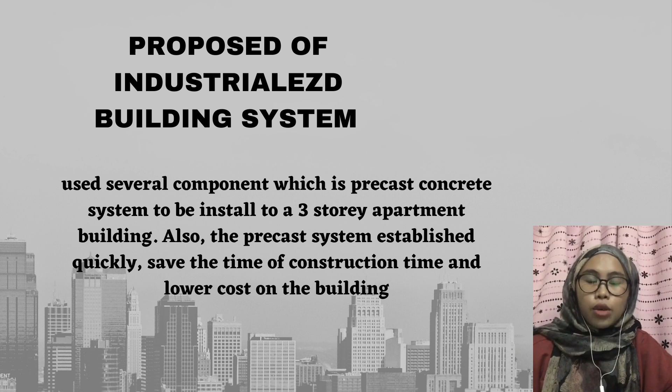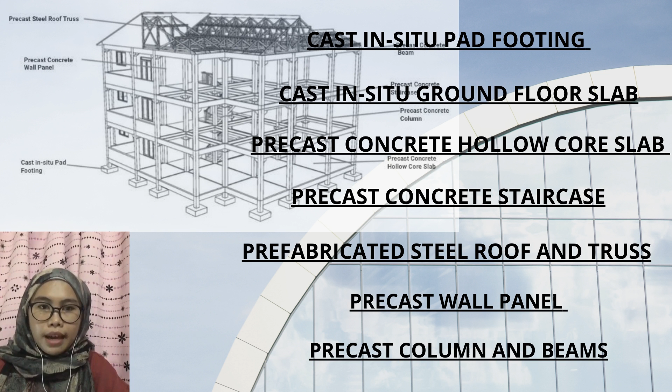Okay, for the framework of this IBS system project, it includes cast in situ pad footing, cast in situ ground floor slab, precast concrete hollow core slab, precast concrete staircase, prefabricated steel roof truss, precast wall panel, and the last one is precast column and beam.

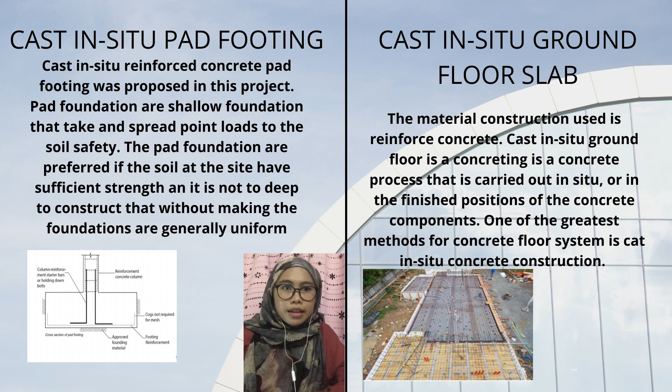For cast in situ pad footing, cast in situ reinforced concrete pad footing was proposed in this project. Pad footings are shallow foundations that take and spread point load to the soil safely. The pad foundation is preferred if the soil at the site has sufficient strength. Other than that, for cast in situ ground floor slab, the construction material used is reinforced concrete, which is a concrete process that is carried out in situ.

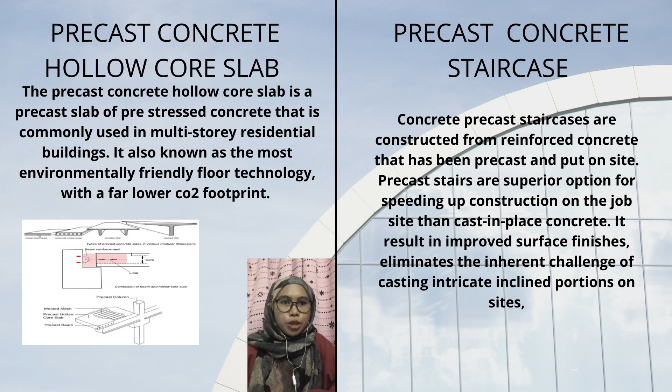Next is precast concrete hollow core slab. The precast concrete hollow core slab is a precast slab of pre-stressed concrete. This is commonly used in multi-story residential buildings. It is also known as the most environmentally friendly floor technology with a far lower CO2 footprint. For precast concrete staircase, it is constructed from reinforced concrete that has been precast and put on site. Precast stairs are a superior option for speeding up construction on the job site than cast in place concrete.

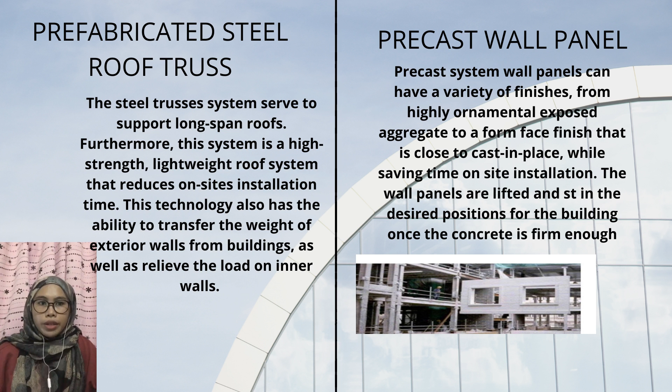Okay, for precast wall panel, precast system wall panels can have a variety of finishes, from highly ornamental exposed aggregate to form face finish that is close to cast in place, while saving time on site installation. The wall panels are lifted and set in the desired position for the building once the concrete is firm enough.

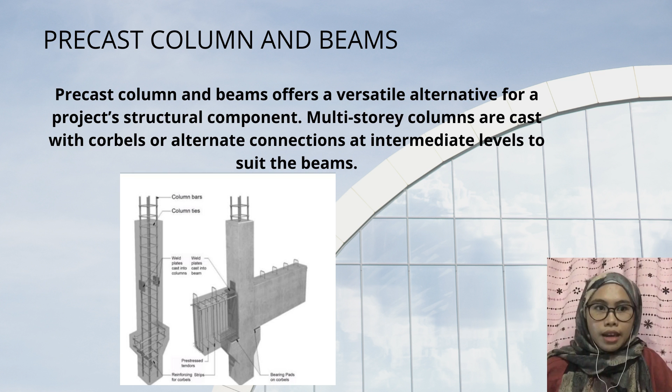The last one of the framework of the IBS system is precast column and beam. Precast column and beam offer a versatile alternative for a project's structural components. Multi-story columns are cast with corbels or alternative connections at intermediate levels to suit the beam.

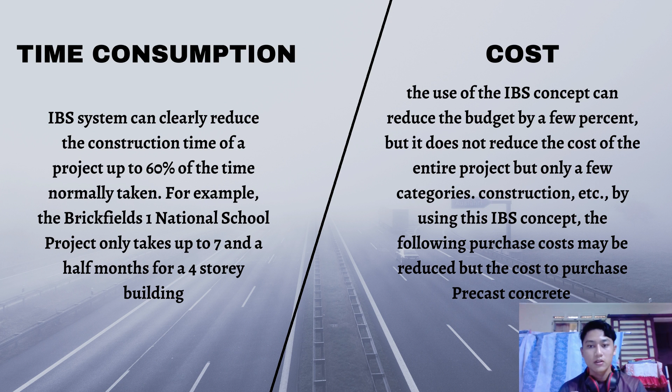So today I would like to present about the suitability for the IBS system. First is time consumption. In the use of the IBS system, the time factor must also be taken into account. This is because each section will be installed in its own order. When there is a component such as a column that has a problem, it will cause the installation order to be interrupted. The second is cost. The cost factor is also important. This is because the use of IBS can only reduce the cost of the material, but it will increase other costs such as transportation costs, installation wages, and others.

The third is the safe bearing capacity of soil. The bearing capacity of soil factor is also very important, especially when installing components for the foundation base. Poor soil condition will cause risk to the building. Fourth is the load to be supported. The main thing that needs to be taken into account in the use of the IBS system is the load of the building. This is because it will determine the size and also the type of concrete grade that will be used in the manufacture of precast concrete. If the calculation is wrong, the building's columns cannot support the weight of the building and it may collapse.

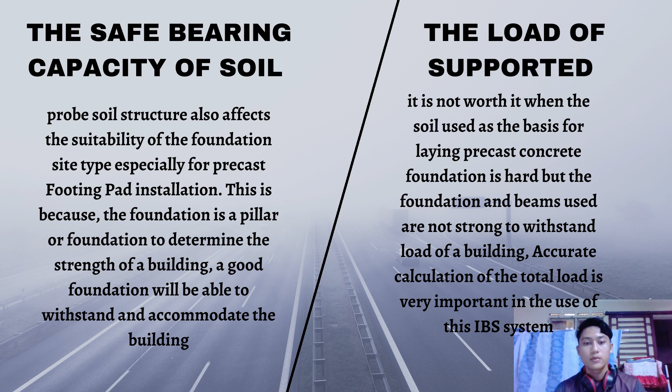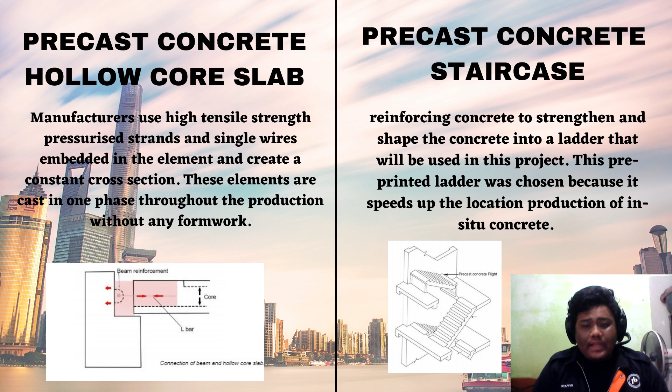Okay, the first is precast concrete hollow core slab. Manufacturers use high tensile strength, pressurised strands, and single wire embedded in the element, cast in one phase of production without any formwork. Okay, the second is precast concrete staircase. Reinforcing concrete to strengthen and shape the concrete into a stair that will be used in this project. Okay, the next is precast wall panels. A variety of finishes from highly ornamental exposed aggregate to a finish that is close to cast in place.

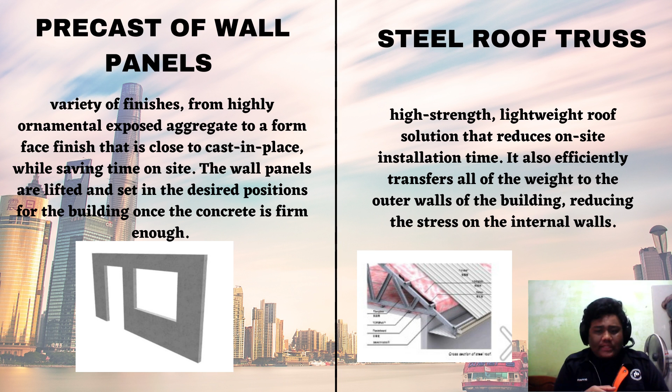The fourth one is steel roof truss. High strength, lightweight roof solution that reduces on-site installation time. It also efficiently transfers all weight to the outer walls of the building, reducing the stress on the internal walls also.

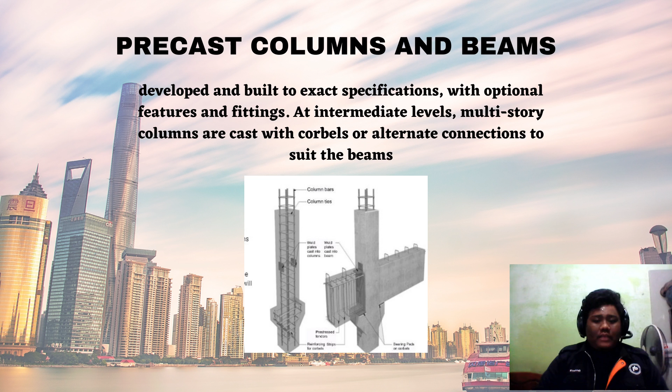Okay, the last for the fabricated process is precast columns and beams. Developed and built to exact specification with optional features and fittings. At intermediate level, multi-story columns are cast with corbels or alternate connections to suit the beams.

Okay, next is connection detail. The first connection detail is a pad footing. Create an excavated land to allow concrete pouring. After that, they're jointed to each other with a bolt mechanically connected to the column splice.

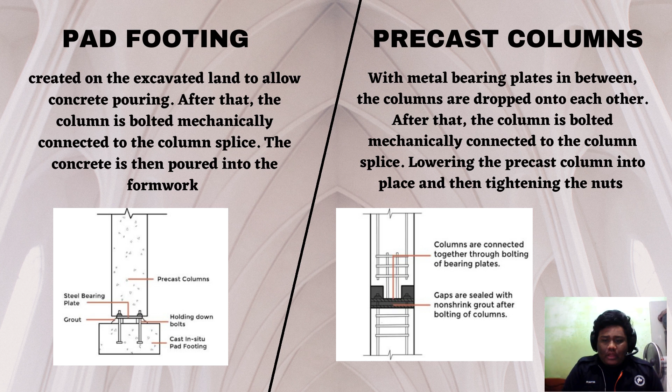Okay, the second one is precast columns with the metal bearing plate in between, the columns dropped onto each other. After that, the column is bolted mechanically to the column splice. Lowering the precast column into place, then tightening the nuts.

Third is precast beams. For precast beams, a metal bearing pad is used to connect the precast beam to the column corbels. After that, the workers will weld plates precast into the column and beams.

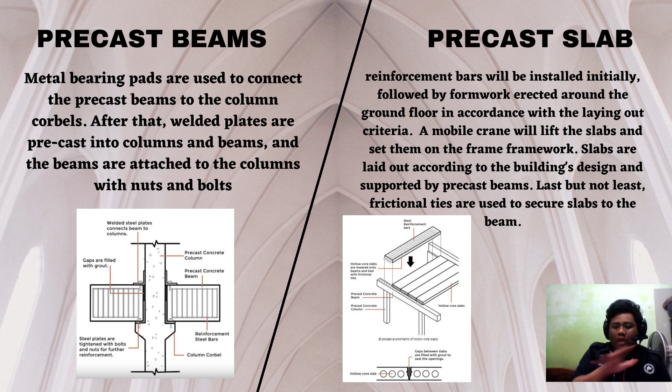Okay, the fourth one is a precast slab. Reinforcement bar will be installed initially, followed by formwork erected around the ground floor in accordance with the layout criteria. And then the workers will use a mobile crane to lift the slab and set them on the framework. Slabs are laid out according to the building design and the structure plan.

Okay, the next connection detail for this IBS case study is precast walls. To install the panels, the workers will use metal plates, and angles are also used to connect panels to each other, like this, and to floor and roof elements. For the wall panel, the workers will weld or bolt them together.

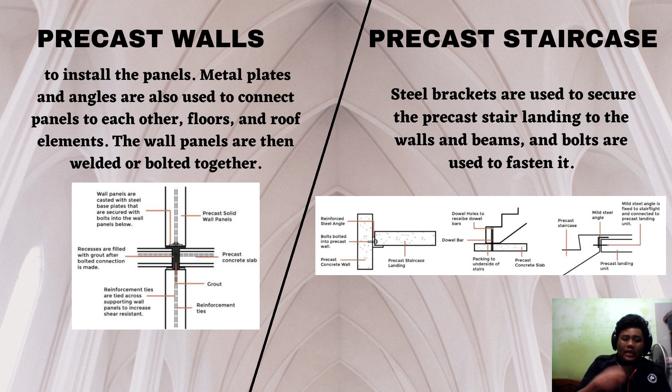The next is precast staircase. Steel brackets are used for jointing the staircase and landing to the walls and beams, and bolts. Then the workers tie them, and bolts are used to fasten it.

Okay, the last one for the connection detail is prefabricated steel roof. At this point, they use a beam connection secured with bolts and nuts. The purlins are then bolted and nutted to the truss. Underlayment material is covered with galvalume. Then metal roof panels are secured to the roof using screws.

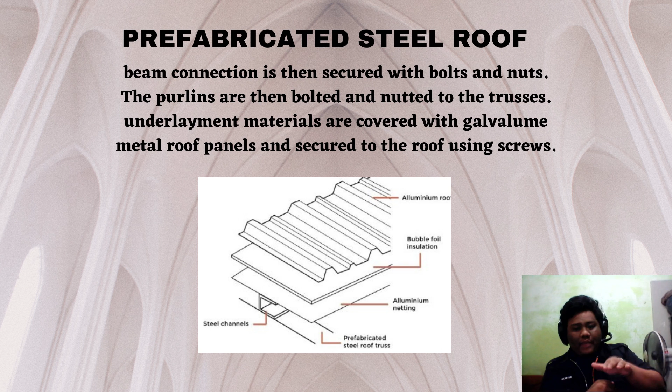Okay, next is the installation procedure. In this installation, we have two types: before the installation, and the second one is during the installation or during the project. Okay, before the project starts, firstly, the client. The client will ask the consultant to help him realize his idea to build the building he requested.

In this situation, the consultant may suggest the client use the IBS system to follow the CIDB request. Then the second one is planning. After the client agrees, the consultants such as architect, engineer, mechanical and electrical engineer, surveyors and others will do planning such as plans, contracts, tendering and other things.

Then submission. After the planning or documentation, the consultant will submit all the documents to the local authority such as pihak berkuasa tempatan and Jabatan Kerja Raya and others involved in government authority for the construction project. Then maybe after a few years or a few months, the local authority will approve the project if there's no problem with the plan, contractor and others.

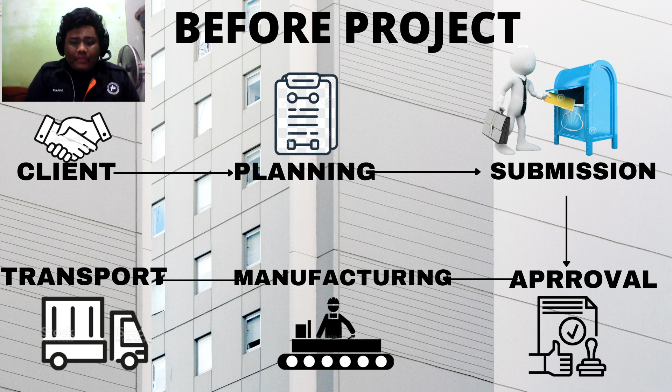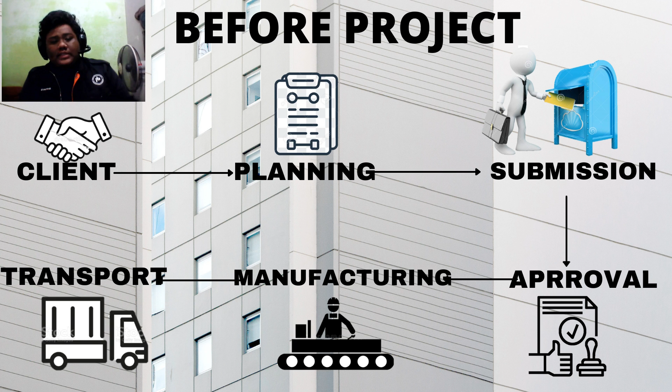Then the consultant will hire a contractor to start the project. After the contractor is hired, at the same time they can also order IBS panels such as walls, slabs, roof truss and others. To start the manufacturing, we send the real specification used in this project. Then after the manufacturing is done, the manufacturer will send all the panels by lorry to the site.

Okay. After that, now we present to you about during the project. Okay, the first step is excavation. The contractor performs excavation work for the foundation before laying the foundation ground beams. This excavation work will follow the plan made by the engineer and also be inspected by the engineer.

And the second one is installation of foundation ground beams. Okay, the contractor will lay the foundation ground beam according to the plan that has been set, and after that, the contractor and also the client will do an inspection to check whether the ground beam is correct according to the plan or not. Then the third one is ground floors.

They start with cast in situ ground floor slab. After that, the contractor can start work on the ground floor slab. They'll place reinforcement on the slab, then pour the cement on that slab.

Okay. The fourth one is precast columns. The contractor will use a mobile crane to transport the columns to each point that has been marked by the workers. When the column has been lifted by the mobile crane, the worker will attach the column with the bolts and nuts between the column and the plate.

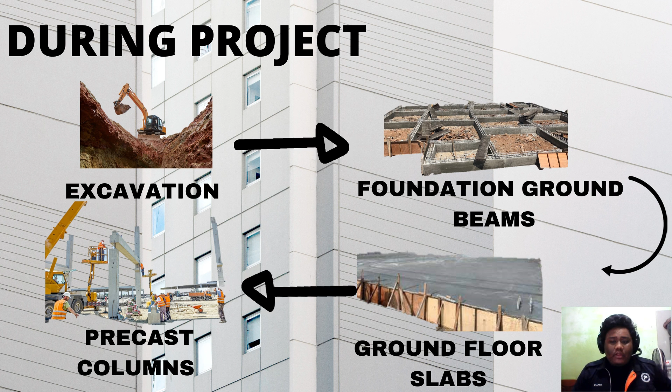Okay. The next is the work for the precast walls. The contractor will use a mobile crane to lift the wall panels and then attach them with the columns and also the slab with bolts and nuts.

After that, starting with precast beams. The process uses a mobile crane to lift up the beams. The connection used is a bolt and nut. After that is the hollow core slab process. That means they use a mobile crane to lift up the hollow core slab and then join it together with the beams that have been installed.

Then the contractor will use the same process until all the stories that have been set in the plan. At the same time, the contractor will also use a mobile crane to lift up the precast IBS staircase to install at the point that has been marked in the plan. The same method is used to connect the staircase with other panels, using bolts and nuts.

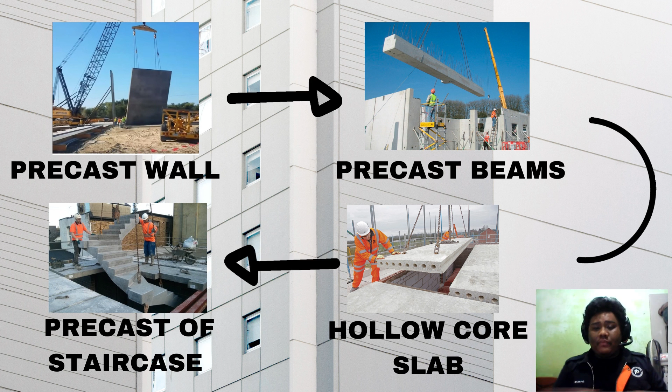Then the last process they use is a prefabricated steel roof truss. The structure part of the building is ready. Then they lift up the steel roof and join it together with the highest level story with a connection detail, also using the same bolt and nut method.

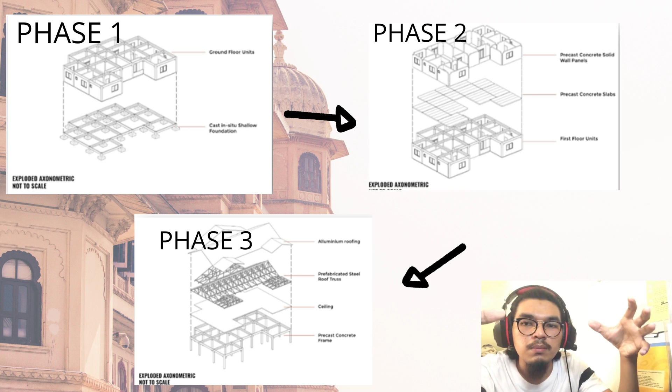So on this project, SK Brickfields Kuala Lumpur, they have a lot of IBS component schedule. For example, the pad footing uses 1050 length and width, and the height is about 400.

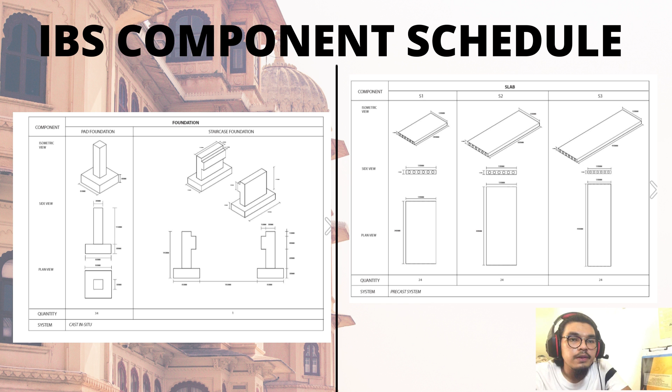And for the slab, they use the hollow core slab. So the function of the IBS component schedule is to make it easier for the manufacturer to make the precast or fabrication of the component for the building.

Second, it's easier for the QS to measure all the components needed for the project. For example, for the exterior wall, the manufacturer will cast the wall with the size suitable for the window used for the project. They have a hollow wall cast in the middle of the wall to insert the window on site. The measurement of this dimension is already in the IBS standard and BQ requirement.

So same with the staircase. The staircase uses precast concrete from the manufacturer. For example, the manufacturer follows the requirement in the IBS standard, which is what type of step they need for this project, the project requirement, and after the staircase is already prepared by the manufacturer, it is then transferred to the site. Then the workers will install the railing on site.

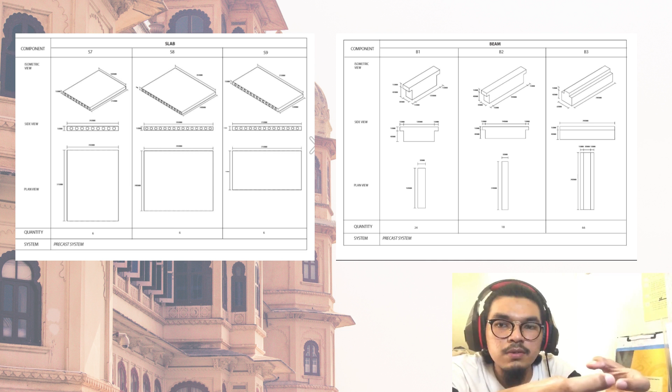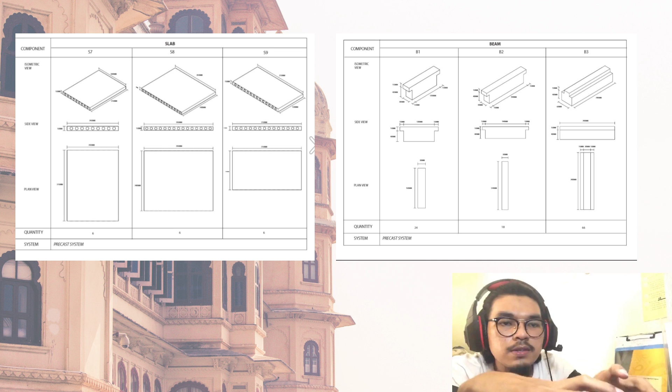For me, in the IBS system, the modular component includes how the component can be coordinated from offsite to on site, how the transportation management works from offsite to on site, and all these things contribute to cost efficiency, time management, and reduced work on site.

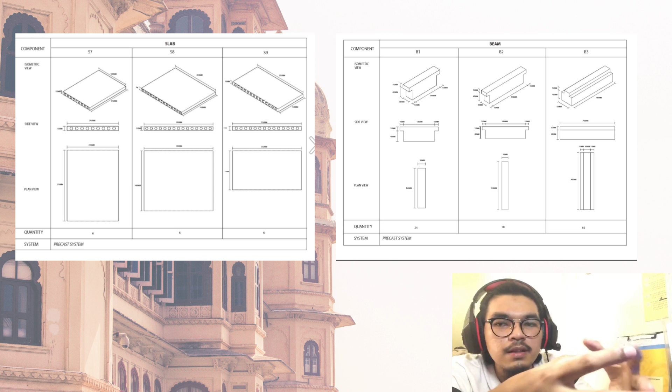Last but not least, for me, the IBS system and schedule modular component is about how the Lego toys can be connected together to become a complete structure or building. So for me, this is my view on how the IBS system can produce a complete building.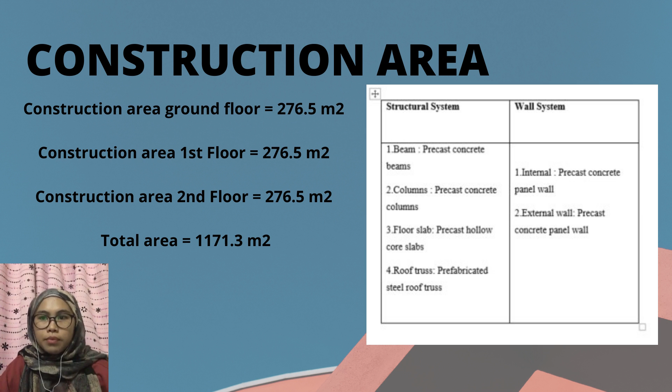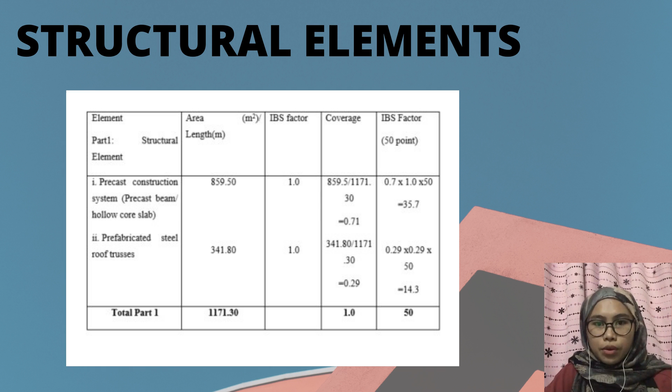Okay, for the IBS calculation score for the building, first, construction area. The total construction area is 1171.3 meters square. For the IBS score part 1, structural element, the total area is 1171.3 meters square. For the coverage, 1.0. For the IBS factor, 50 points.

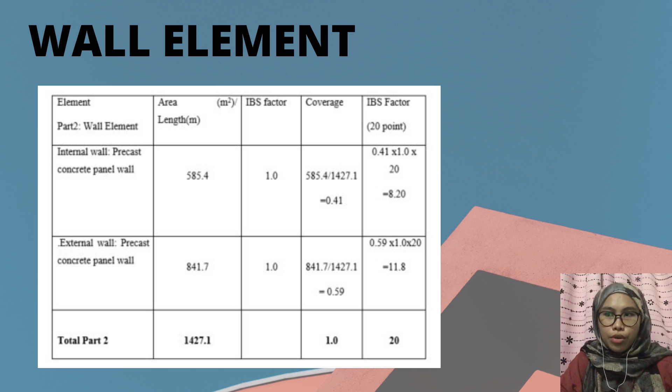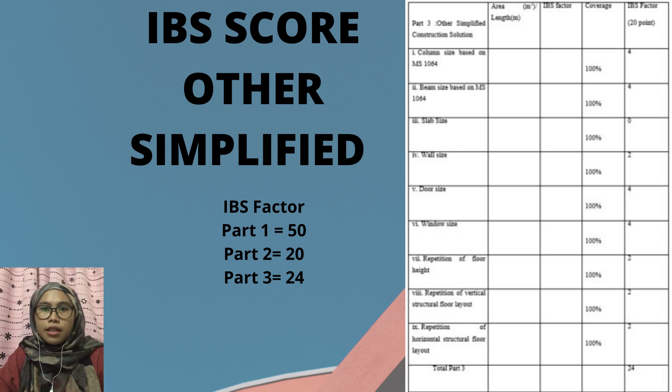Okay, for IBS score part 2, wall element, the total area is 1427.1 meter square. For the coverage, 1.0. For the IBS factor, 20 points. IBS score part 3, for other simplified, coverage is 100%. For the IBS factor, the total is 24 points. So the total of part 3 is 24.

In conclusion, the demand for the use of the IBS system is still not satisfactory because there are still many contractors and developers who refuse to use this system due to several factors, such as lack of material resources, lack of cost, and lack of resources. This situation can raise concern about the efficiency of the use of the IBS system. Therefore, the government must play an important role in implementing and developing the construction sector in Malaysia.